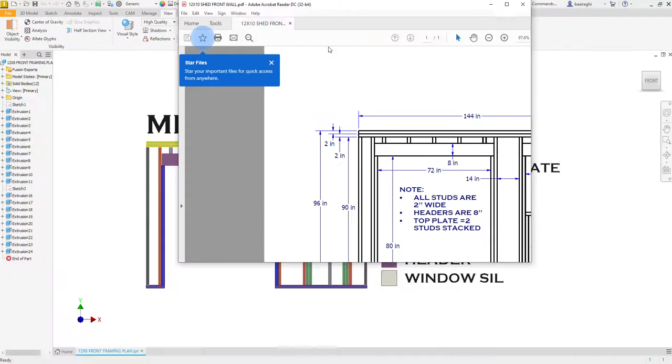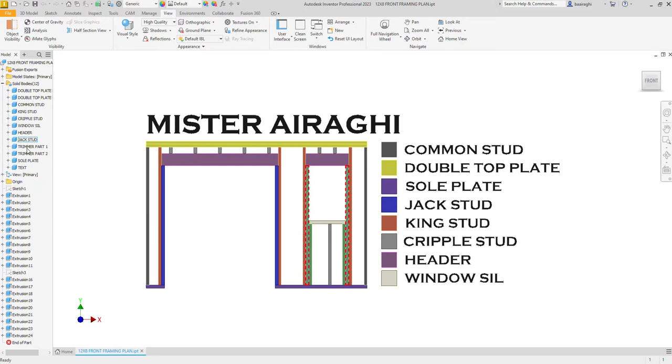And then I'm going to show you how to get started and how to create this. We're going to show you two things. I'm going to show you how to draw rectangles as an easy way to create this pretty quickly, and then how to create what's called, I'm going to come over here to create, these are called separate solids. So they make up different solids so you can actually make it look realistic while still being in a part file.

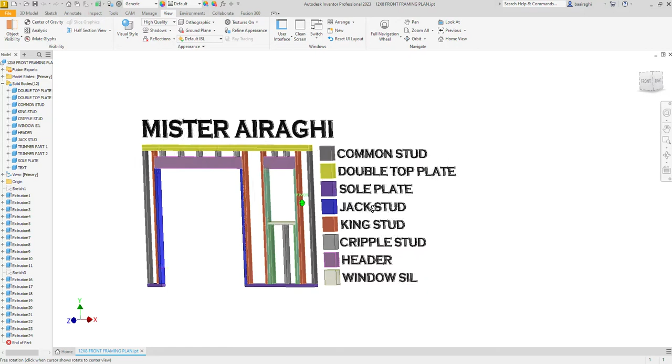So this is what we're going to do. That's what we're going to work with. This is what you'll have made in the end. The colors you choose doesn't matter to me. Whatever colors you want, I just want you to color code the correct studs. So let's go ahead and get started here, and I'll show you how this works.

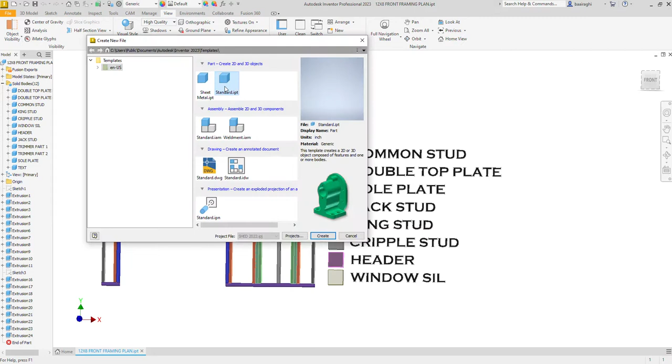So what I'm going to do is I'm going to start with a new file, and if we look at our system here, this is 144 inches, which is 12 feet, and this is 96 inches, which is 8 feet. So I'm going to start something simple. I'm going to start on the XY plane.

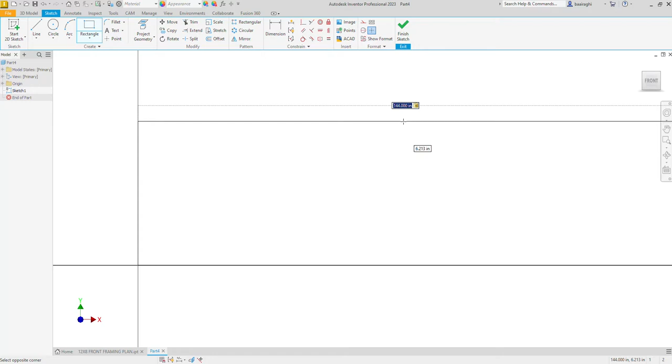And I'm going to create a rectangle. And if you notice, this is in inches, so it's going to be really big. So it's going to be 144 at the top, and I'm hitting tab to get back and forth between these two, and this is going to be 96. Now remember, you can double click on the mouse wheel and it zooms out to the outside edge. So I'm just going to start at the top, and I'm going to sort of work my way down.

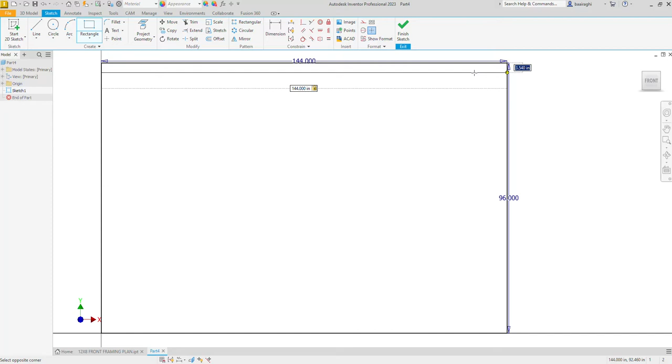I have a double top plate here, and I'm coming all the way over to here. Now you can type this way. You can say 144 tab, and you can make this 2. Okay, so all of our measurements are going to be basically based on 2x4s, but our 2 for this is going to be actually in real life 1.5 inches, which is 1.5 by 3.5, but we're going to do it as 2x4 because I think that makes it a little bit easier.

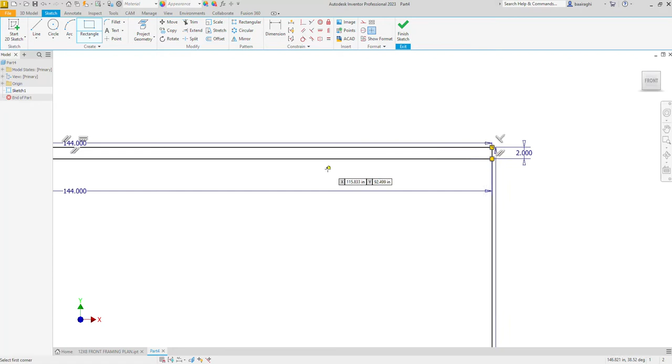So we have our double top plate that is 2 inches wide. Okay, so this is 2 inches, and I'm just bringing it over and touching there, and I'm going to hit 2. So you can see, oh, it went the wrong way though. Let's try that again.

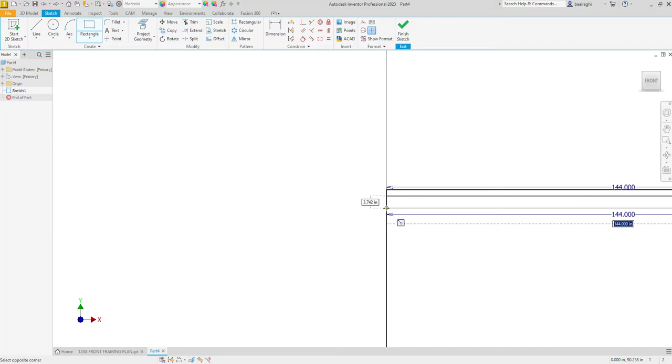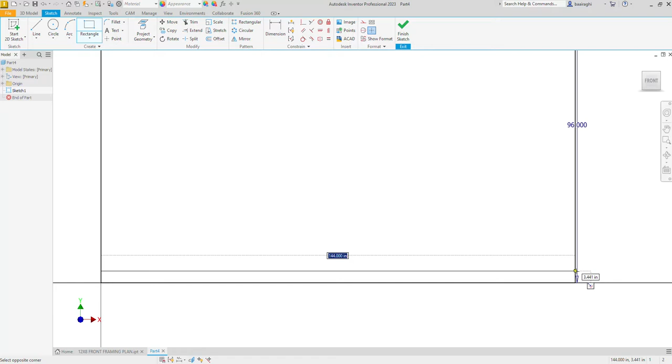Okay, I'll start over on this side this time, and I'll come over here, and I want to hit tab first, so it comes over to here, and I'm going to type 2. There we go. Now I'm going to do another stud. What I'm going to do is start with something here so I can trim it later. I'm going to make this 2. This is going to be my sole plate, and I can cut it later to make it a little bit easier, so we'll make this 2.

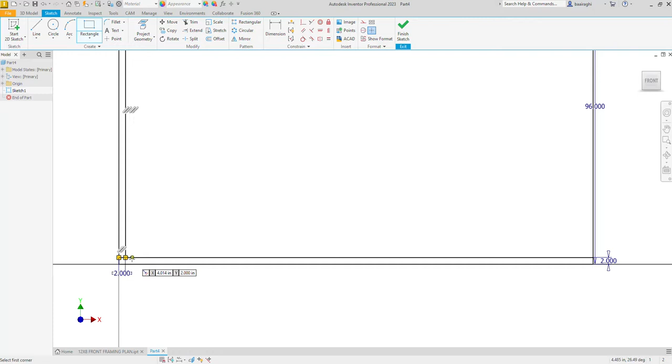Now everything I draw is going to be basically from the top to the bottom. So I'm going to do a stud here, again that's 2. So what I want to show you now is how to extrude this, and I want you to understand. So when I go to finish sketch, let me zoom all the way out again.

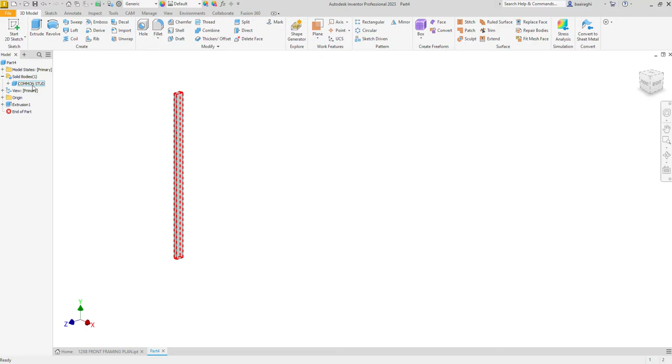I'm going to extrude, starting with this stud, and this is going to be 4 inches. Then I'm going to come down, and if you see this, there's only one solid that's printing or creating right now, and I'm going to call this a common stud.

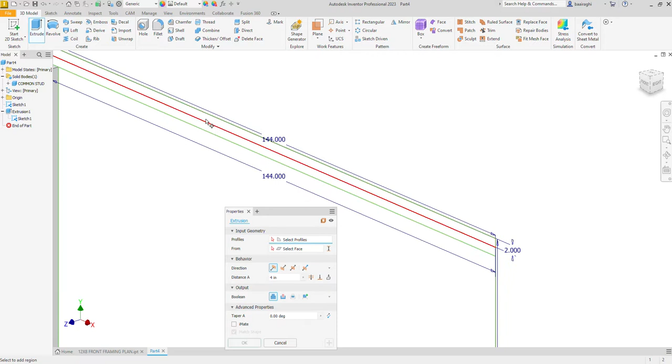Okay, and what happens is now I've got a solid body up here called common stud, and everything else disappears. So I'm going to come over to here, and I'm opening this. I'm going to right click and say share sketch, and that turns this back on. I can go to extrude, and then I'm going to choose this, and this is my top plate.

Now this time I don't want it to go to common stud, so I'm going to come over to this button right here and click on new solid. I'm going to call my new solid double top plate - oops, let's fix that. Okay, double top plate. So I'll go ahead and hit OK, and what I want you to see now, this is the tricky part.

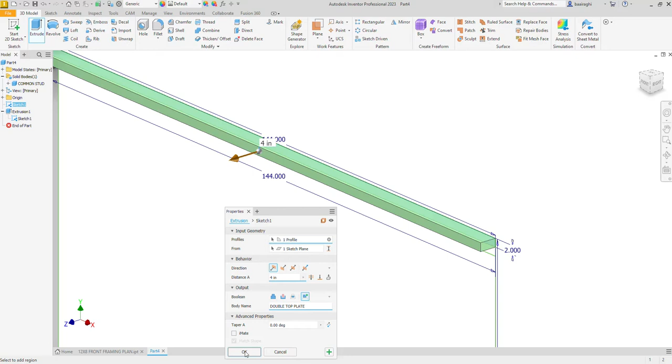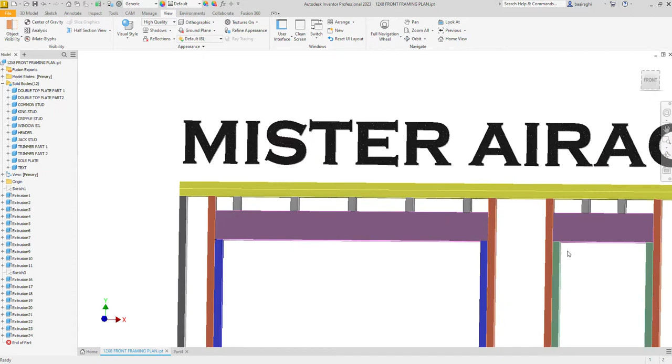So if we look back here, you can see that there is one here and one here. If you see over here, double plate top, or double top plate part 1, double top plate part 2. So I've got 2 of them that are stacked up next to each other, and the reason I have that is I made 2 separate solids.

Let me show you what happens if I create a single solid. I'm going to add this to the other one. So when I add that to the other one and I go to extrude, I can select this, 4 inches, and then I come down here and join it with this solid, and watch what happens - see how it turns it into a solid piece?

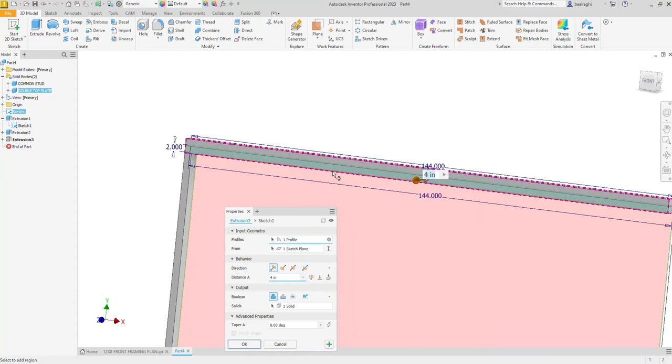I don't want that. So I'm going to double click on this extrusion 3, and I'm going to make it a new solid, and I'm going to call this double top plate part - oh shoot, where'd that go? Let's try that again, I think I accidentally hit something. There we go, alright, new solid.

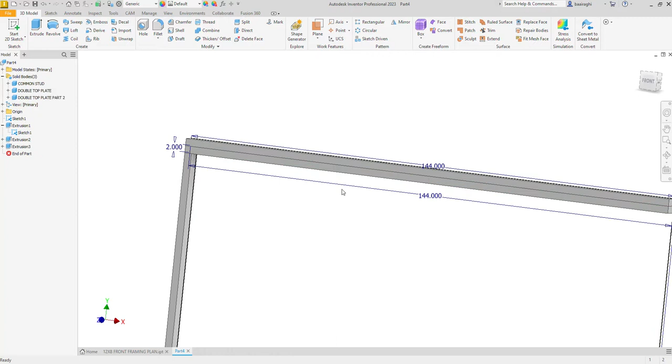Two. Okay, and now that creates - so now do you see how they are two separate pieces and they are two separate solids over here?

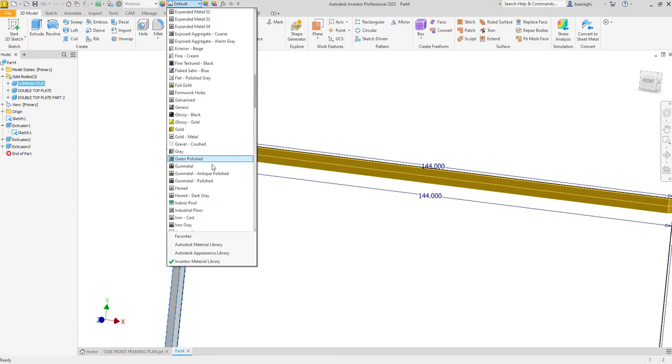So I'm going to make my life a little bit easier. I'm going to click on this, hold shift, and select this, and I'm going to change these to, let's say, gold. And then I'm going to change my common stud to green, how about that?

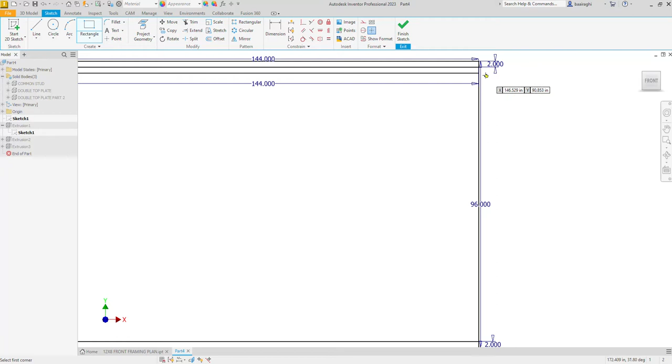So I'll come back to the bottom, the sole plate, because I need to cut it out for the door anyway, so I'll come back to that later. But I can come up to this sketch now, and I'll show you what I'm going to do here. I'm going to select over here, and make my common stud over here, and I'm going to finish it, and go ahead and go to extrude.

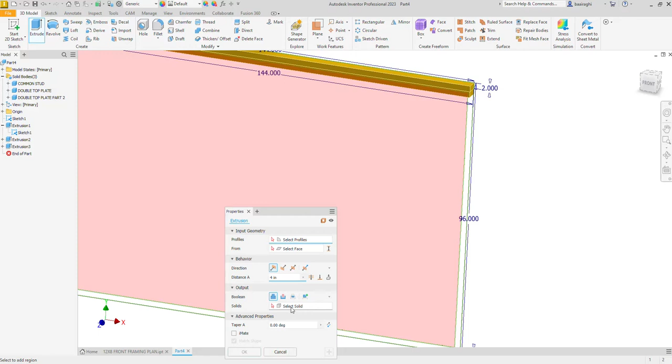Now you'll do the whole thing and come back and do that, but I just wanted you to see this. So instead of creating a new solid, I'm going to join that solid. Right here I'm going to select the solid, and I'm going to come up here to common stud, and it didn't select that.

So when I do that, it chooses the same color as my common stud over here. If you see, when I hit OK, now when I click on this common stud, it shows extrusion 1 and extrusion 4. And if you make a mistake, you can always just go back and double click on it and do it again.

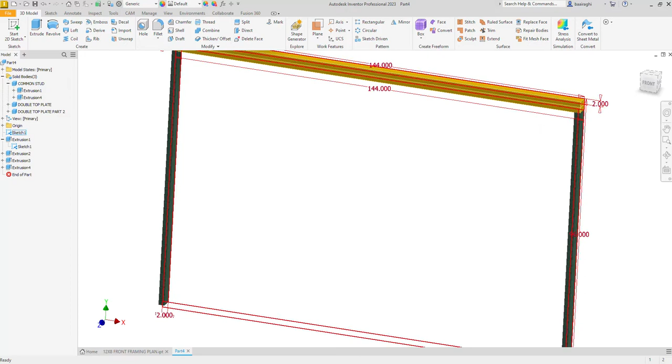So I'm going to show you a couple more studs, and I'm going to show you how to measure them. All right, so let's look at this drawing real quick.

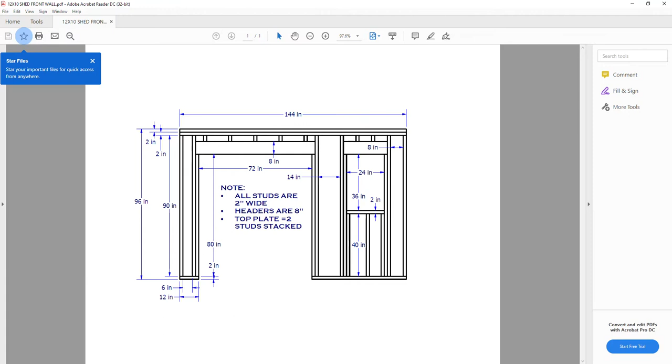So watch what I do here. I'm gonna scoot this over, and what I'm gonna do is I'm just gonna create, just to start with, a stud that comes down from the top 2 inches again. And then I'm gonna create a dimension between here and here, and this dimension is 6.

And then this one starts from here and it comes up. This time I'm going to type both sides. I'm going to type 2 tab, and the height of this is 80.

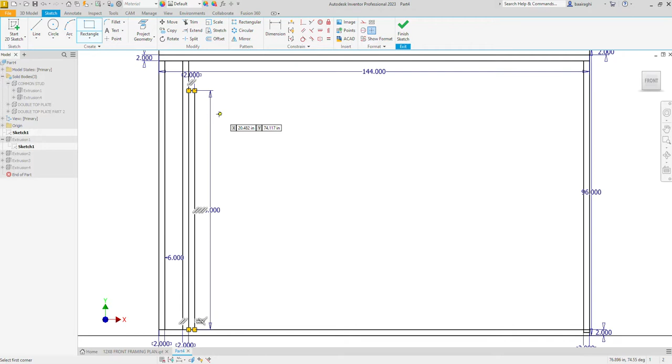So I know now this is going to trim off here, so I'm just going to go ahead and create a line. Just like that. So now I have a line like this and a line like that.

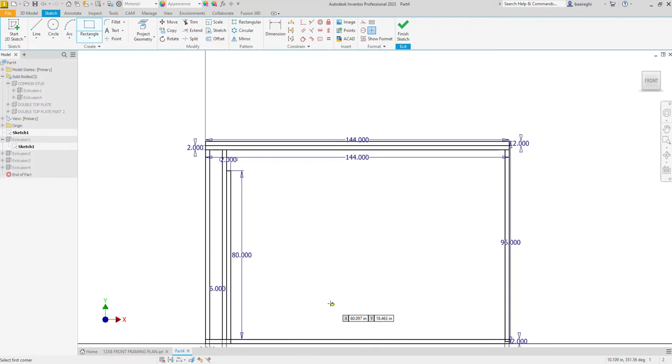Alright, now what I'm going to do is I'm going to create another one, because I want to be able to trim this now. So I'm going to create another stud here. That's 2, 80.

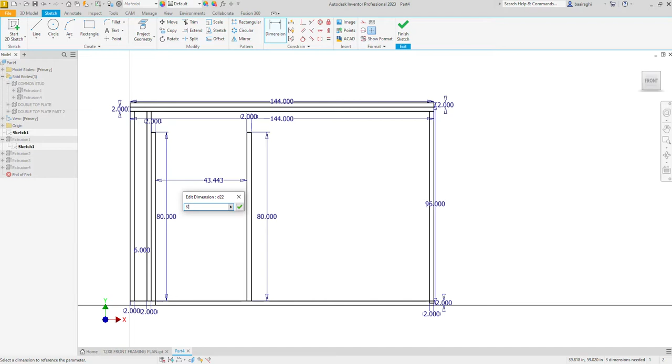And then I'm going to measure, and my measurement between here and here is going to be 6 feet. You can type it this way, or you can type it with a little foot symbol. So that gives me 6 feet and 0 inches. That way you can see the difference between inches and feet.

Okay, so the next thing I'm going to do is I'm going to add my header. And did I do that right? Yes, I did that right.

So then my header, it goes all the way over to this side, which is 76 inches, and that 76 inches comes over to this edge here. You see how it snaps to that edge? And then I'm going to come up 8 inches.

Oops, I did that wrong. Sorry. So I'm going to hit tab 8, and that leaves a tiny little space up here at the top.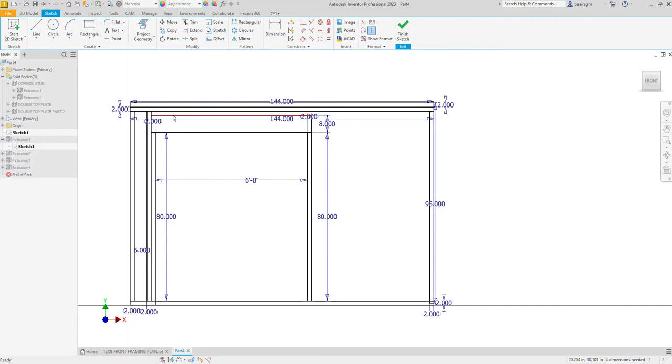And that tiny little space is where I'm going to put my cripple studs. And I don't know if... I think I made that too... I think this is supposed to be 80 to here.

Okay, so what I'm going to do is I'm going to delete this. And I'm going to click on the bottom here, and the bottom here. So see how that says 82? This should be 80. There we go.

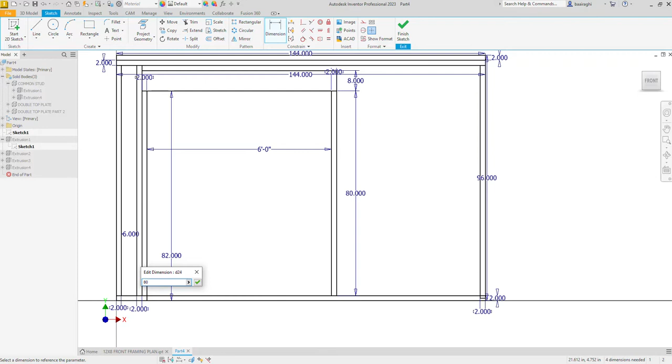Oop, that popped up the bottom. I will show you what I'm doing is I'm just going to go back and fix some of these lines. But everything fixed, it leaves a little bit more of a space up here, which is fine.

I can put in my jack stud over here. All I'm doing is using this to attach things back together. And it doesn't seem to like that, so this should be 80 inches to the... Anyway, I'll go back and fix this.

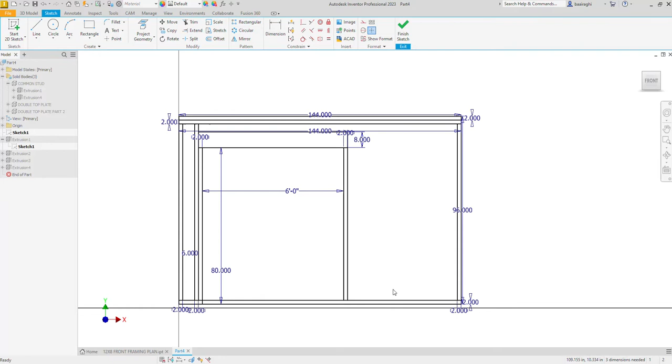So anyway, I'll just do this real quick.

And then the last thing I'm going to do, just to show you, is I'm going to draw a line down here, from here to here, and then I'm going to go up to trim, and boop and boop, and that leaves me this space at the bottom for my sole plate over here, and this space over here for the sole plate.

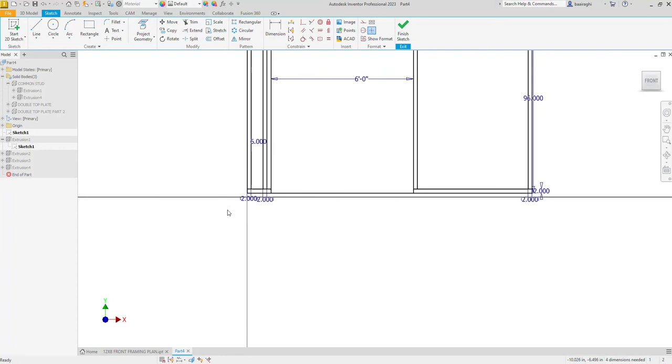This, I don't know if you noticed, but it popped up in the air when I tried to fix it, so I can move it right back to 0, 0 right here. And that way it looks a little bit more realistic again.

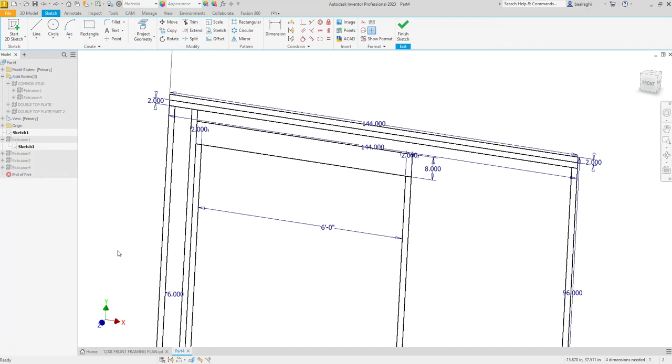I somehow messed up this, but it's okay. Alright, so that gets you started. That should be able to give you an opportunity to move a little bit forward.